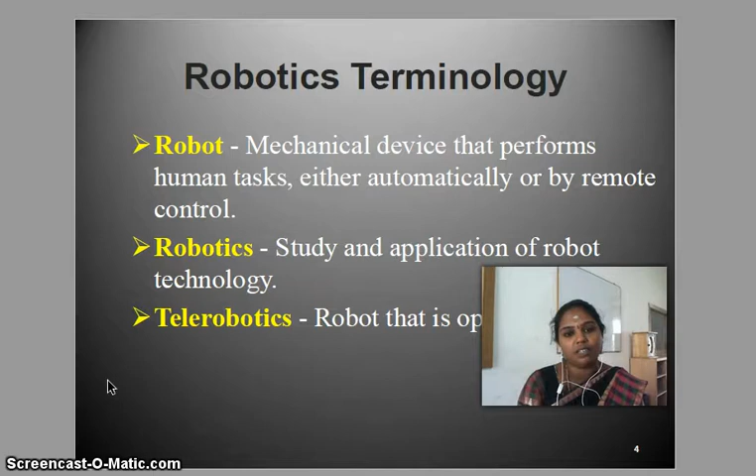Robotics terminology: a robot is a mechanical device that performs human tasks either automatically or by using remote control, and it is a multitasking device. Robotics is the study and application of robotic technology; if you study about robots, it is called robotics. Telerobotics is the robot which is operated from a remote location.

Definition of a robot: a reprogrammable multifunctional manipulator designed to move material, parts, tools or specialized devices through various programmed motions for the performance of a variety of tasks. It is defined by the Robot Institute of America.

So it is reprogrammable. Once you program the robot, you can erase that and reprogram it. It is multifunctional, it can do multiple functions, and it has a manipulator, a multifunctional manipulator designed to move materials.

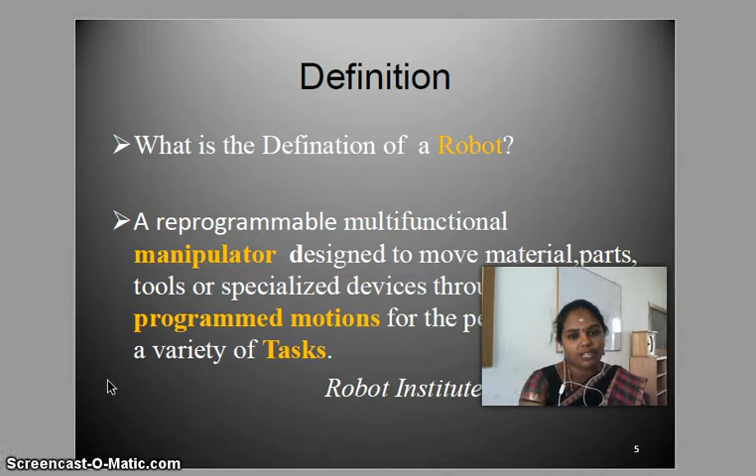For example, in our laboratory we have a pick and place robot. It is used to move to a particular chess coin, pick the chess coin, and move it to some other place. So it is used to move material, parts, tools or specialized devices through various programmed motions for performance of a variety of tasks. You can do difficult tasks like lifting highly weighted parts or materials using these robots.

Laws of robotics: Asimov proposed 3 laws of robotics. Law 1: a robot may not injure a human being or, through inaction, allow a human being to come to harm. Law 2: a robot must obey orders given to it by human beings, except where such orders would conflict with the first law.

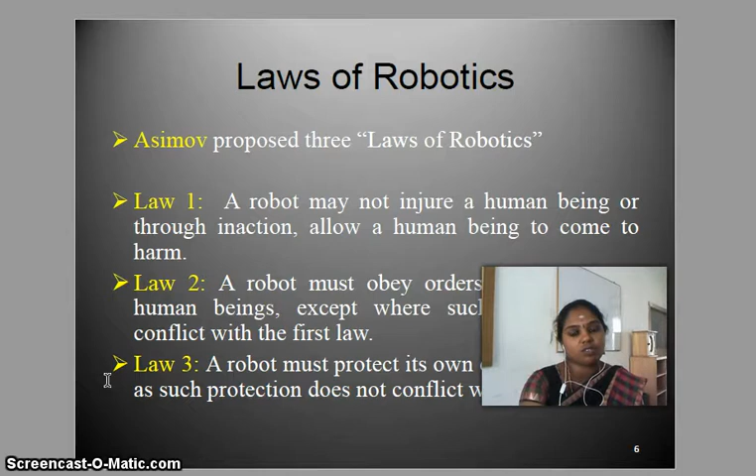Law 3: a robot must protect its own existence as long as such protection does not conflict with the first or second law. The robot control loop is the main loop for robotic control. Every robot must have these 3 components.

The three are sense, think, and act, which is nothing but what a human does. We sense using nose, mouth, tongue; likewise the robot also has sensors for sensing. We think using our brain; likewise the robot can think using artificial intelligence data. We act using motions in our hand and movement using our legs; likewise the robot can move, speak, display text and visuals, everything done with the help of its mechanical parts.

Sense means: speech sensor, vision sensor, acceleration sensor, temperature sensor, position sensor, distance sensor, touch sensor, force sensor, magnetic field sensor, light sensor, sound sensor, and position sensors are used to sense the outside physical quantities.

Then task planning: think means it should do task planning. First it should plan the task using programs, then classify the plans, and then learn what things to do using artificial intelligence. Then it processes data, and then does path planning and motion planning, and gives output information.

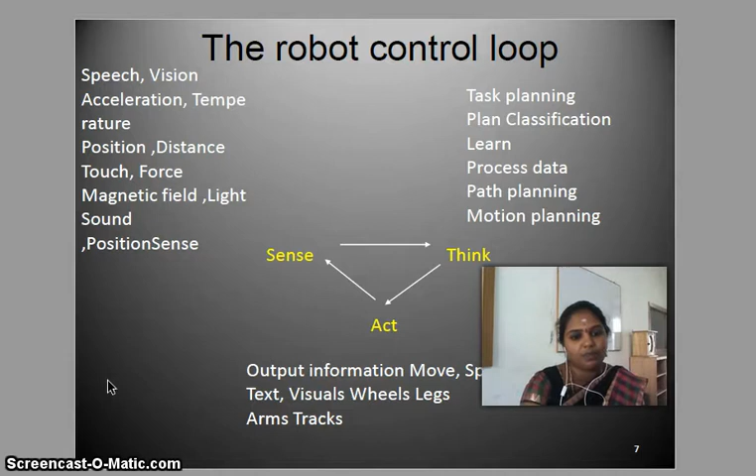First one is industrial robots. Industrial robots are for material handling. They can handle many materials within the timing - particular timers are there, so within the timing it can be used for handling the materials.

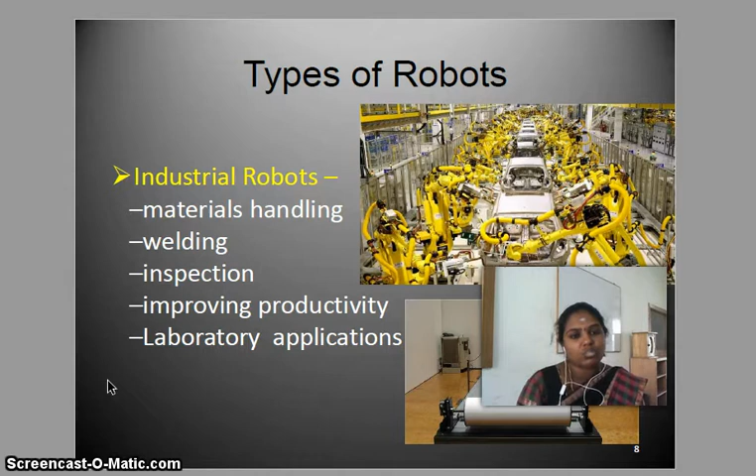And welding robots are there, so the robots can do welding within that space and within the timing. And inspection robots are there, so that improving productivity will be there. And laboratory applications. So next, types of robots.

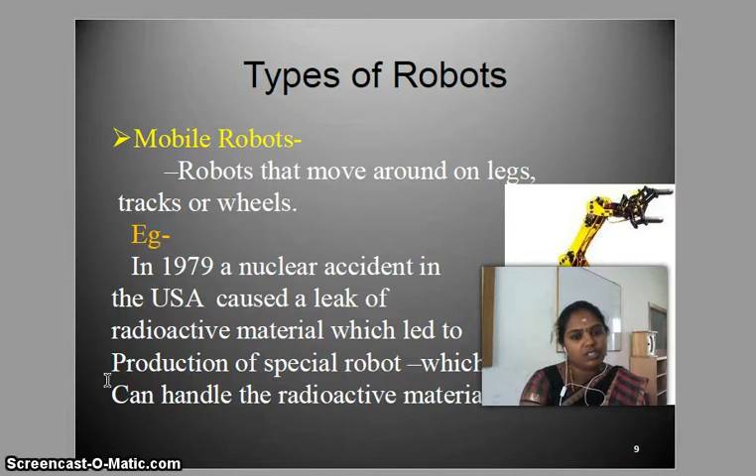Mobile robots are used to move around on legs, tracks or wheels. Example: in 1979 a nuclear accident in the USA caused a leak of radioactive material, which led to the production of a special robot which can handle radioactive materials in a nuclear power plant.

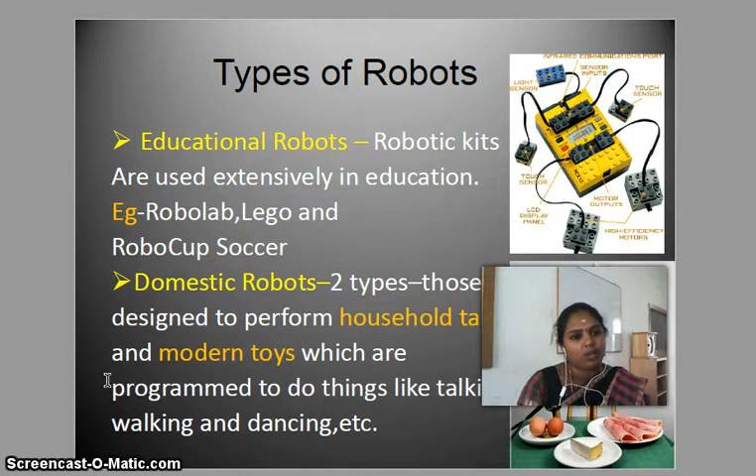Types of robots: educational robots, domestic robots. Educational robots are used to educate students using robotic kits, like Robolab, Lego, RoboCup, and so on. And then domestic robots will do household work, and modern toys.

For example, our arms are like the manipulator, and the end effector is our fingers. Likewise you can assume it. And then actuators are the muscles of the manipulator - servo motor, stepper motor, pneumatic, hydraulic cylinder, anything can be an actuator. And the sensor is a collection of information about the internal state of the robot, or for communication with the outside environment.

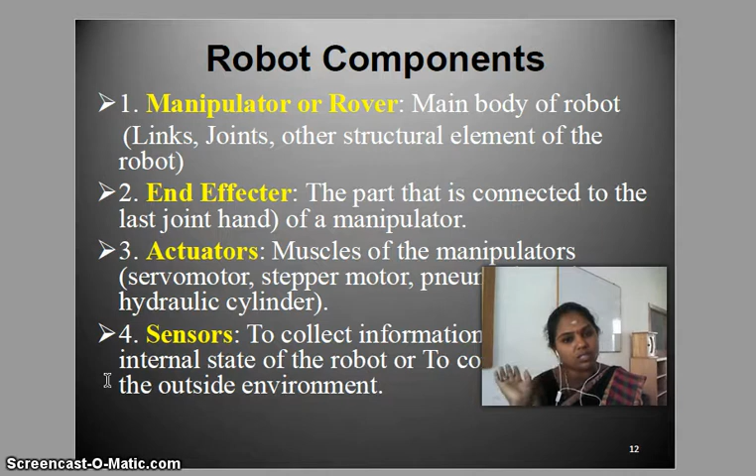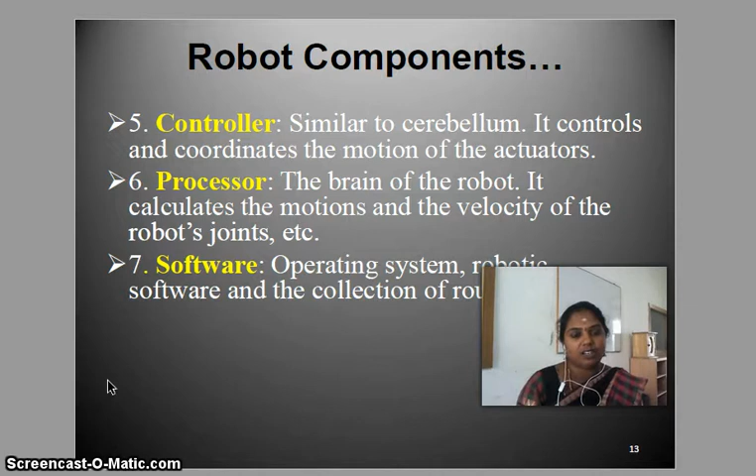The software will control the processor, controller, joints, end effector, etc. It organizes everything through the software. Software is nothing but some programs.

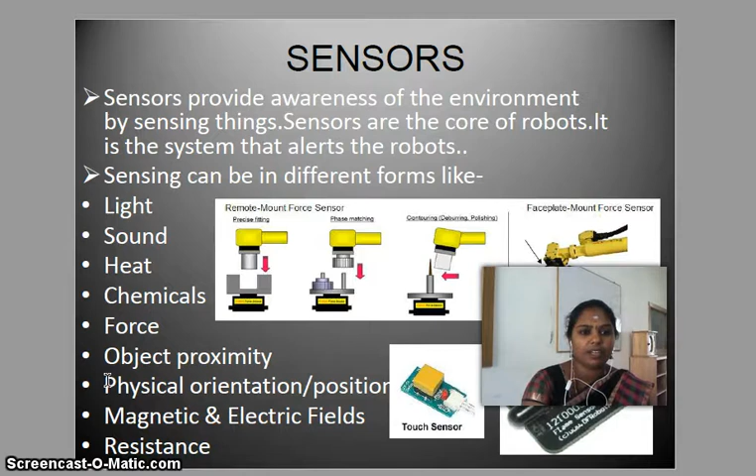Sensors usually provide awareness of the environment by sensing things. Sensors are the core of robots - they are the system that alerts the robot. So we have light, sound, heat, chemical, force, object or proximity sensors, physical orientation, magnetic, electric fields, resistance, etc.

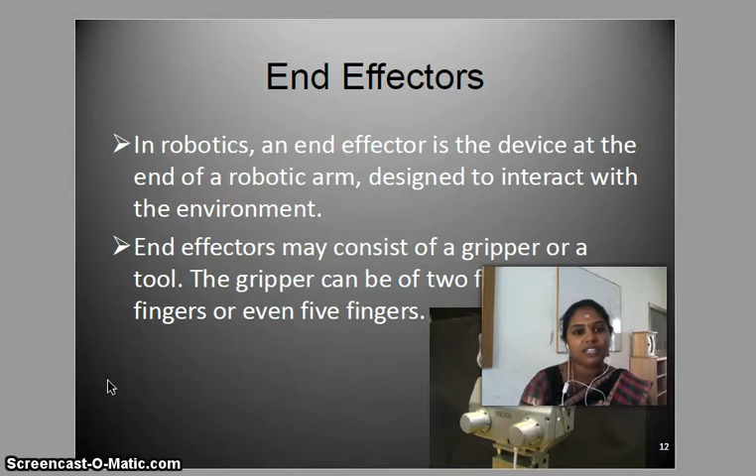End effectors may consist of a gripper or a tool. The gripper can have 2 fingers, 3 fingers, or even 5 fingers.

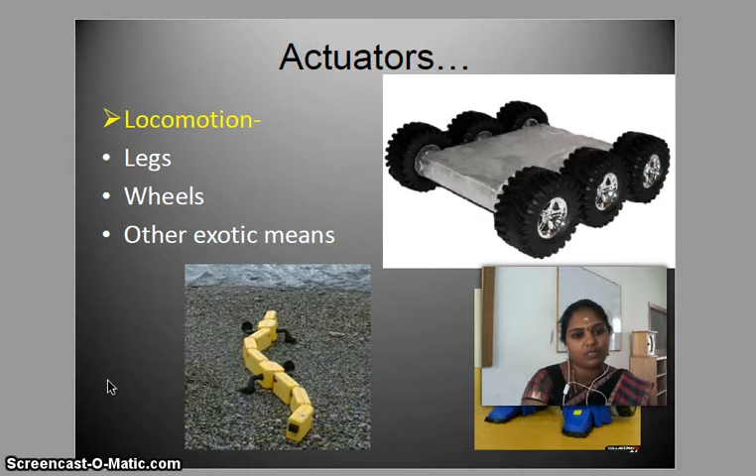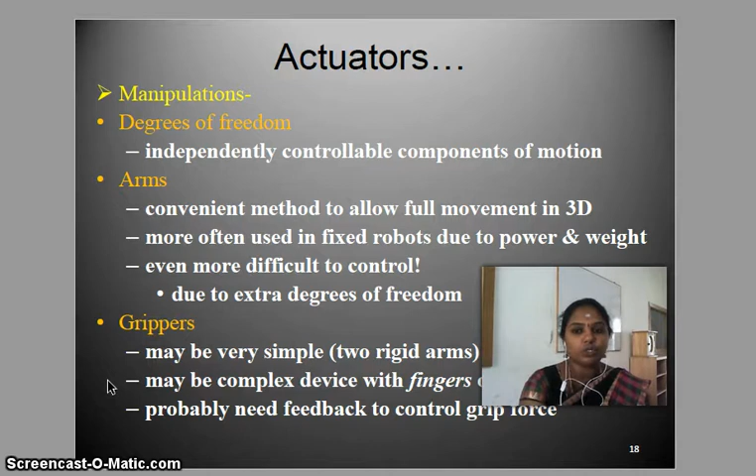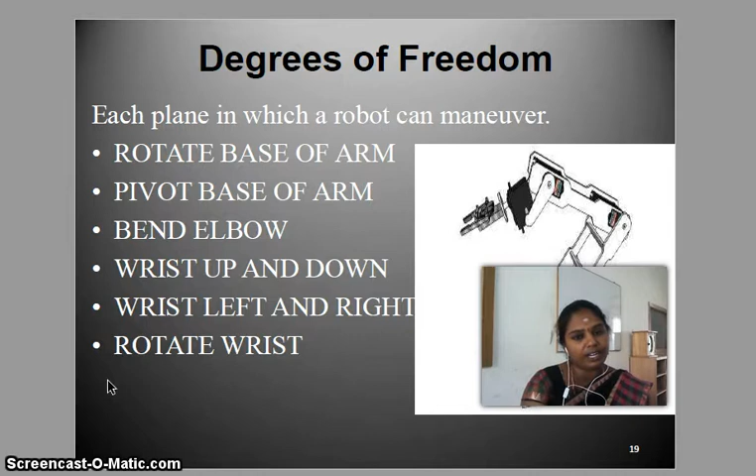Degrees of freedom refers to each plane in which a robot can maneuver - rotate base of arm, pivot base of arm, bend elbow, wrist up and down, wrist left and right, and rotate wrist. The purpose of robots.

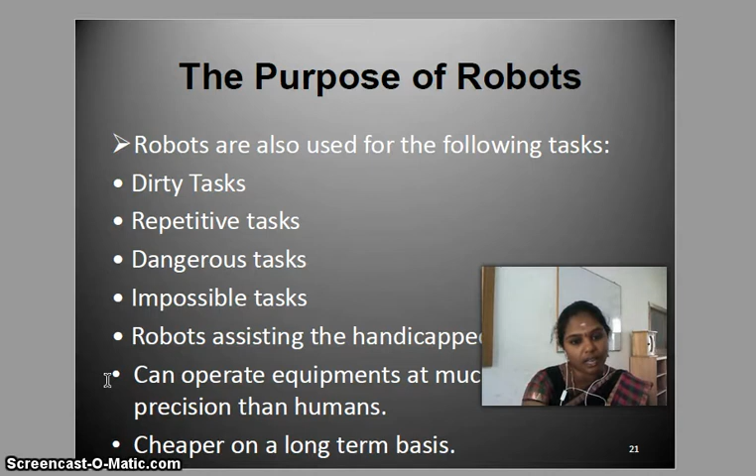Robots are also used for the following tasks: dirty tasks, repetitive tasks, dangerous tasks, impossible tasks. Robots assisting the handicapped can operate equipment at much higher precision than humans, and are cheaper on a long-term basis.

Exploration - space missions, robots in the Antarctic, exploring volcanoes, underwater exploration. NASA has a variety of robots for space missions.

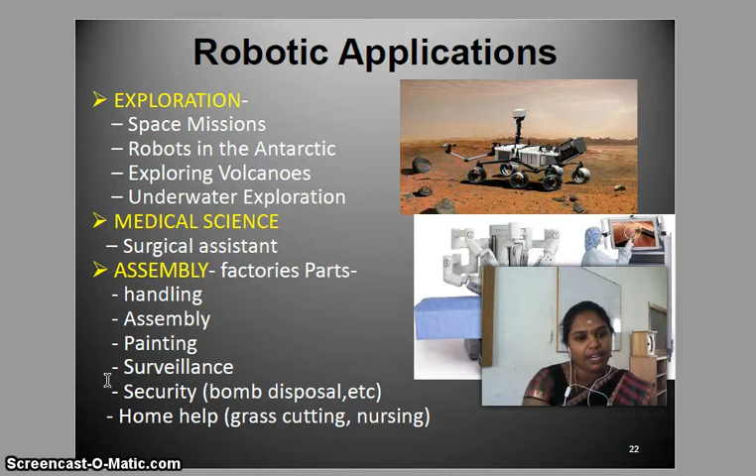In medical science, it is used for surgical assistance, and in assembly - factory parts handling, assembly, painting, surveillance, security, etc. So many uses are there for robots.